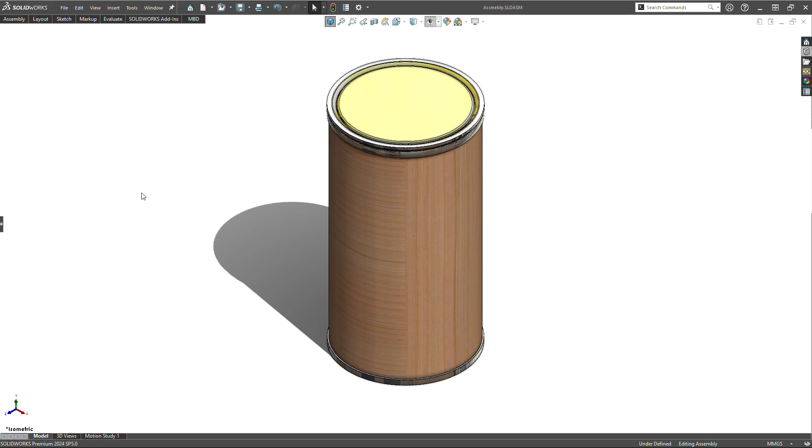Consider this is the shipment that arrived at our facility, and we want to take the material or whatever we have inside of this barrel out. Consider this barrel is filled up to the top right now. So this is the barrel that just arrived at our facility. Now what we're gonna do, we just open the lid of it.

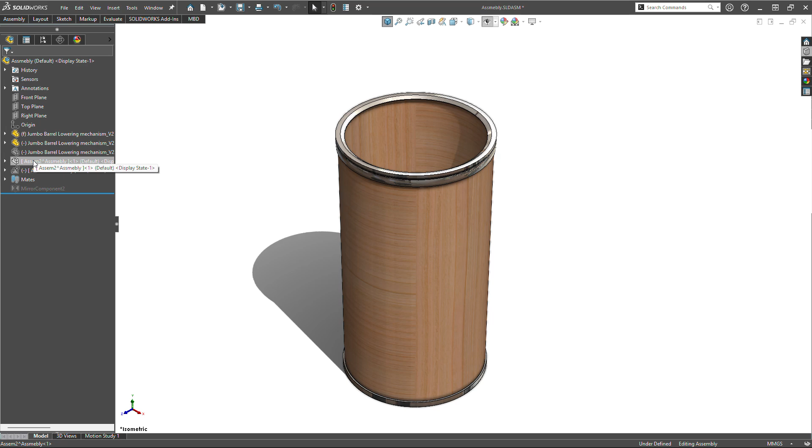If we open the lid, you will see it will have this kind of weight plate at the very bottom. So we need to lift up this weight plate in order to get the equipment or whatever we have inside of it. In order to get the stuff out of this barrel, we will insert this kind of assembly on top of it. We will be inserting this assembly on one side and the same assembly on the other side as well. But let me show you how this assembly will be inserted.

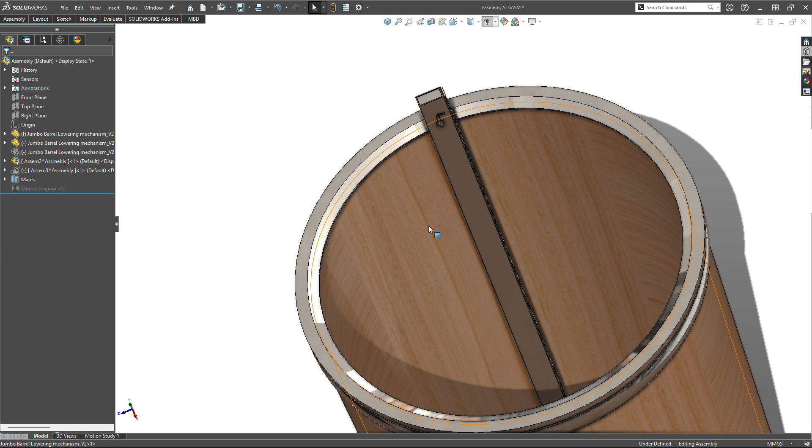This is the very first thing that we will insert into it. This is the customized barrel. This is the customized side pillar, and I will show you in a bit how this will be assembling with the other part. So let me just hide this barrel so we can see what's going on inside there. So this is the weight plate that we will have, and this is our side pillar. If we just look into the side pillar, let me hide this face so we can see it clearly.

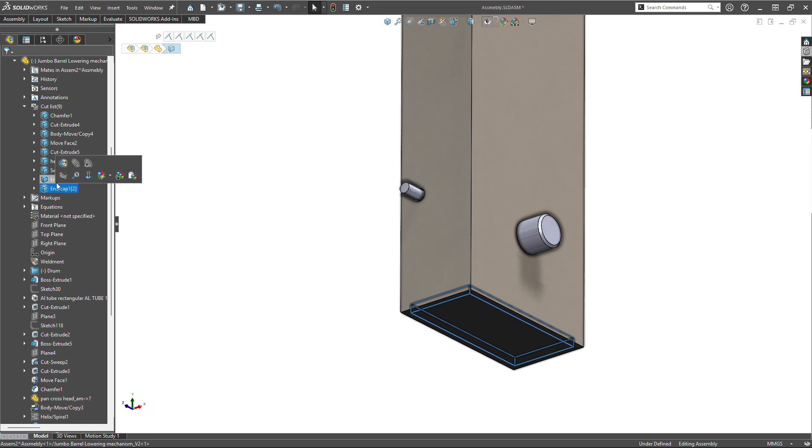Okay, so this is what we will have inside of it. You can see there's a lot going on inside there, because this is a ratchet mechanism. Because this bolt over here needs to go in and out. When it will move out, it will make its interaction with this plate over here. When it will go out, it will lock itself with this plate over here. So if this bar moves up, this plate will move up as well. Okay, I hope this point is clear now.

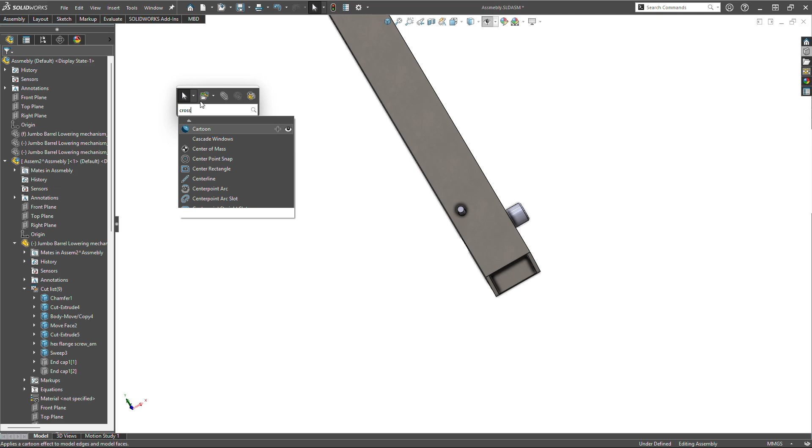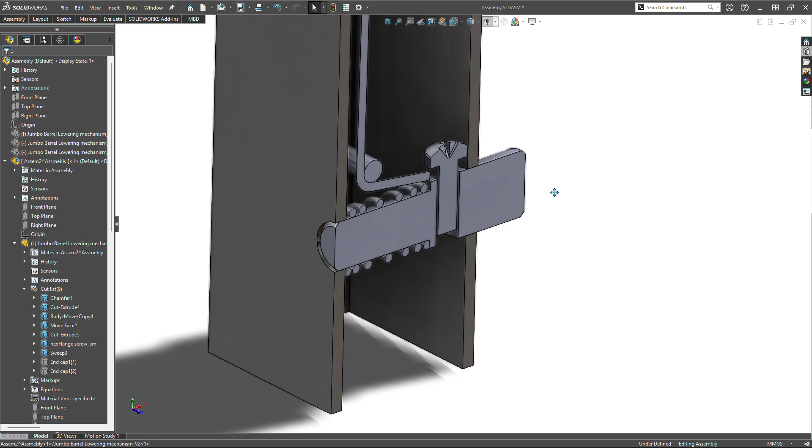So I will just create a cross section to show you what's going on inside of it. This is my mechanism inside of it. We will have this kind of a bolt, and on top of this bolt we will have this spring. This spring will make sure that the tightness of this pin to the plate is ensured. And we will have this kind of rope going on that will be connected to this bolt over here, and this rope will be used to engage or disengage this bolt to the other part.

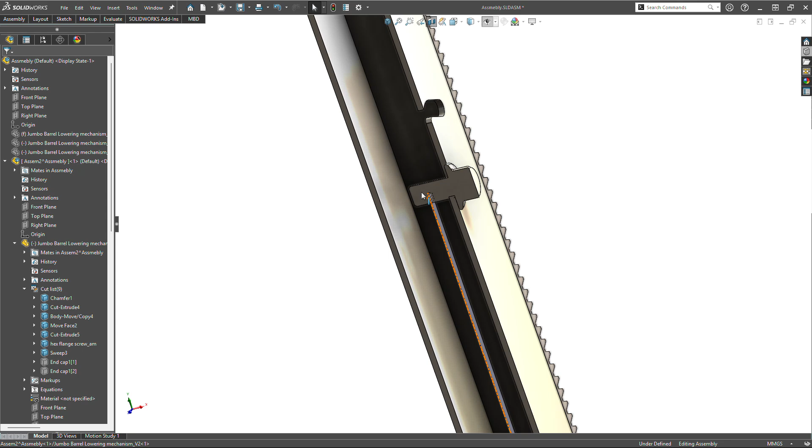So let's see where this rope is going on the upper side. Over here, this rope will be attached to this point over here. Let me remove the cross section. The rope will be attached to this bolt over here. This bolt can be used to position it in this position or in this position. One of these positions will engage, the other position will disengage the bolt to the main part.

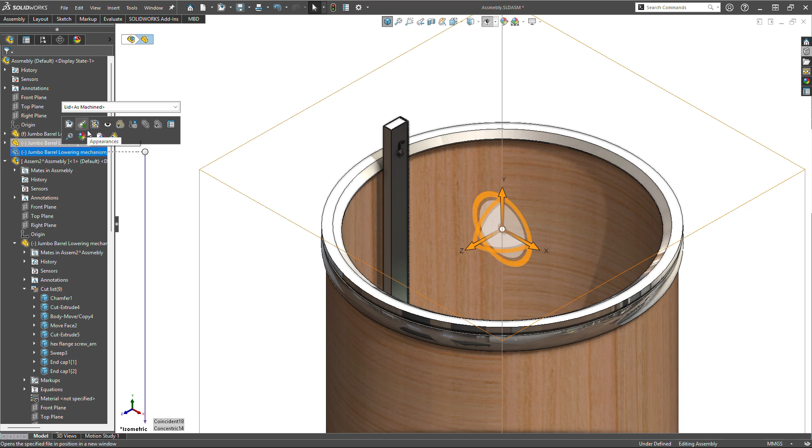So let's say we have engaged this bolt, we have inserted this bar, and we have engaged this pin over here. Now this bar and the lower plate will coincide. It will move as the same body. We have inserted this bar on one side. Now let me bring back the barrel. Now what we will do, we will insert this mechanism over here. This is the next step.

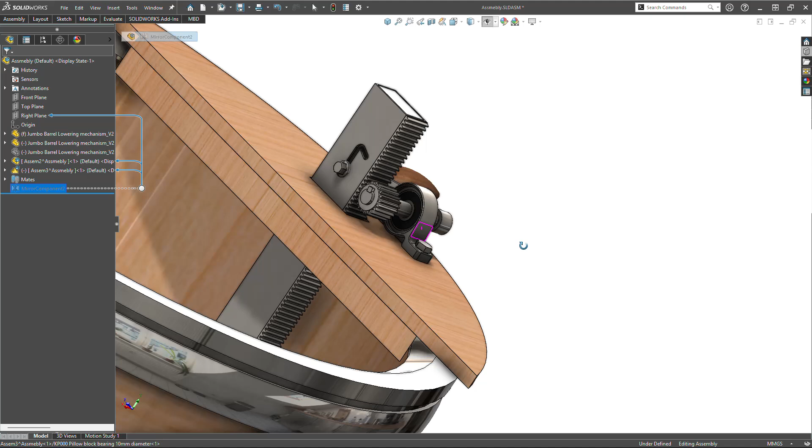This mechanism will be responsible for moving this lever up and down. Okay, so the same kind of mechanism we will have on the other side as well. This mechanism is easy to insert, and it is easy to manufacture and assemble as well. These two parts will be made of wood, and this can be customized as per the barrel size. Consider we have a bigger diameter barrel, this can be further increased.

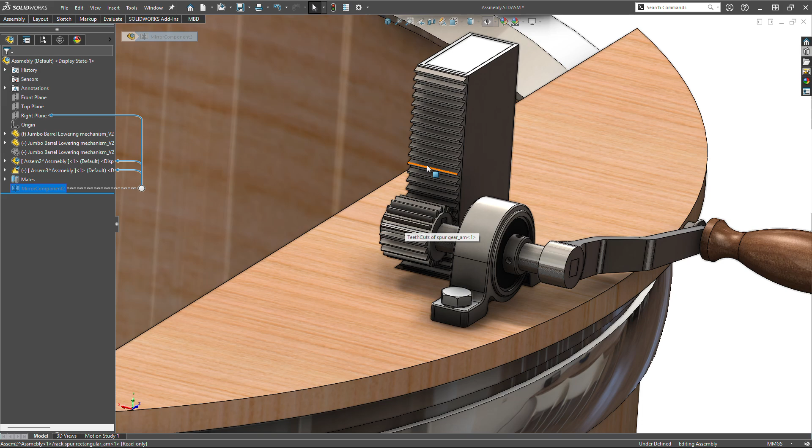Then we have this simple rack and pinion mechanism over here. This gear will be attached to this lever over here. If we move this lever, this gear will move, and this will allow the board to move up and down as well. So I will insert the same mechanism on the other side as well. This is the mechanism on the other side.

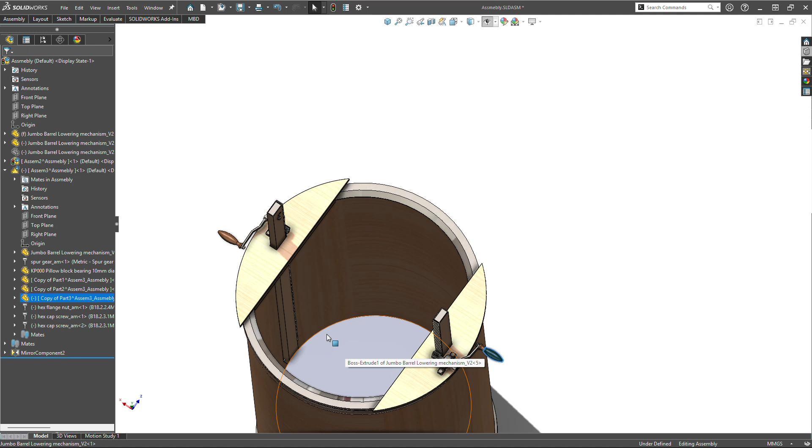Now what we need to do, we just need to rotate this handle, and you can see the bars are moving up. If the bars are moving up, same goes for the plate over here. I will keep the handle moving. You can see if I just keep the handle moving, it will go up like this, like this. So you can lift up the plate as much as you want, and you can take the stuff out of it.

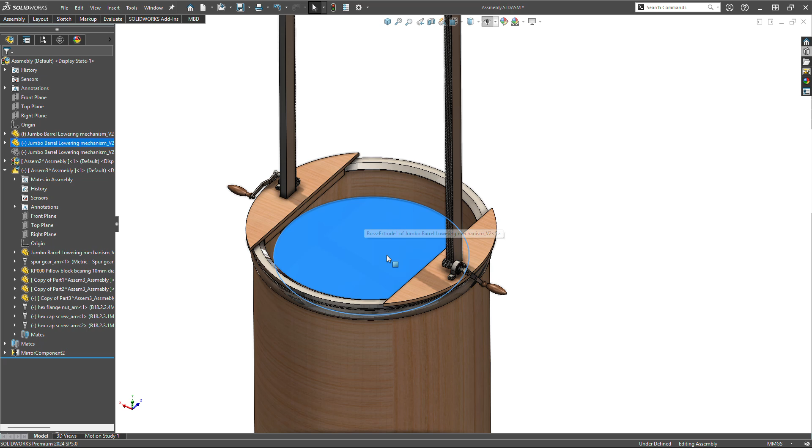And same goes for the lowering mechanism. If you want to lower it, what you will do, you will rotate the handle on the opposite side like this, and it will keep moving until it goes to the very bottom like this. This is the overall mechanism of it, how it will work.

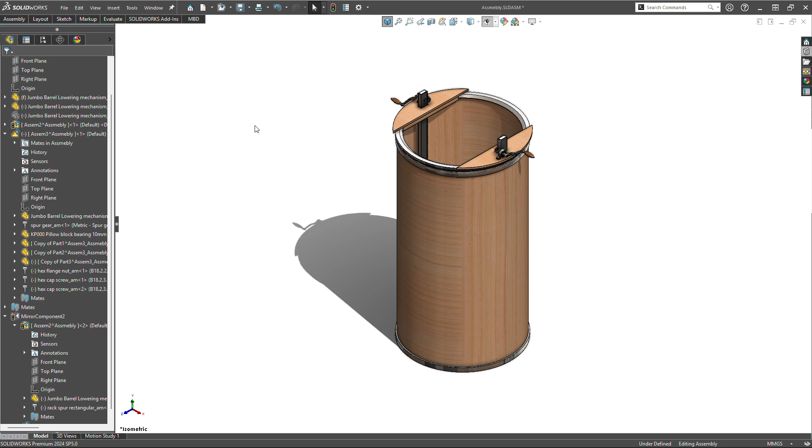And all the things can be manufactured at our own facility, and if you want to manufacture these, we can definitely talk that through. And if you want to manufacture this from your own supplier, that's also appreciable. And if you want, I can provide you all the files, and if you need anything else, please let me know.